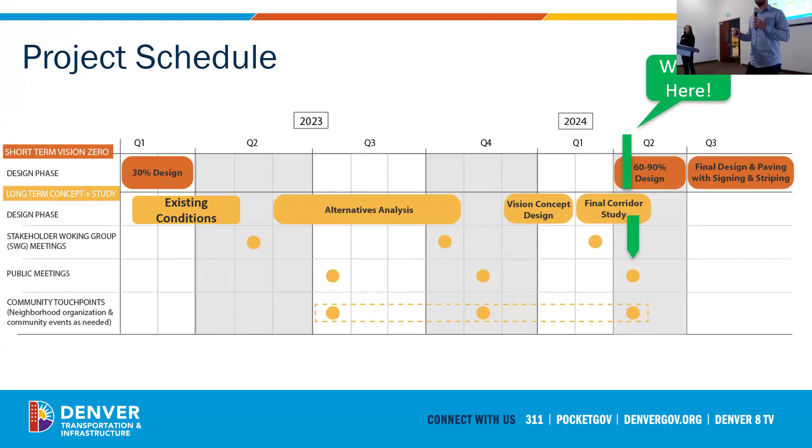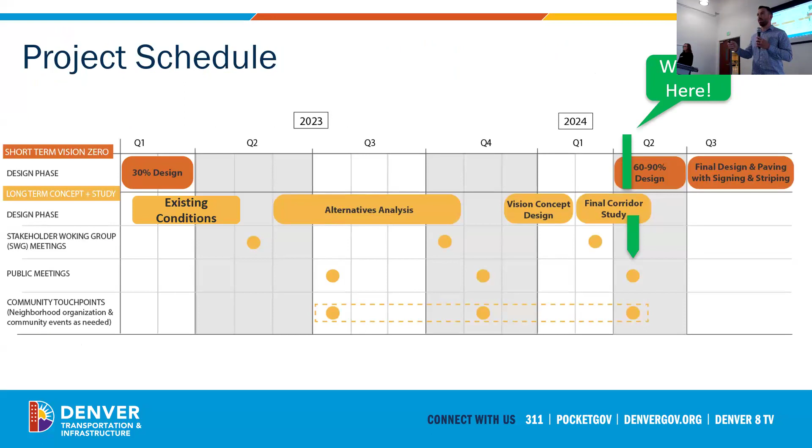So where we are on this project, as I said, final public meeting. We've had 3 of these previously, this is the 4th. We are finalizing our corridor study and presenting to you all the design we're planning to move forward with for the long-term improvements. For short-term improvements, we're finalizing and tweaking those last-minute changes for the implementation happening this summer, specifically between 40th Ave and 17th Ave. That's that 4 to 3 lane conversion.

So how did we get here? About 11 months ago, last summer, we had our first public meeting here. We submitted about 400 flyers to the neighborhood, put out about 20 yard signs, put out notification to the council and RNO newsletters. We had about 40 people attend that meeting, whether online or in person.

In addition to that public meeting, we had a bunch of community touch points. We came to farmers markets, went to block parties, and had about 125 people interact with us at those locations as well. As a result, we had over 100 comments from folks from public meetings, touch points, and direct emails as well.

What did we learn from that? Really first and foremost, making sure we are using our existing plans that have been talked about on this corridor in the past to determine what we're going to do here in the future. A big thing was people want to cross York — this is a neighborhood street. While it is an arterial, it still runs through a neighborhood, a residential street. We understand this is a barrier for people trying to cross York Street in segment B. Improvements could be made to the west end of the park and golf course, really talking about making sure we can cross York to get to regional destinations such as City Park.

Josephine, north of 40th Ave, should be a neighborhood street and not a freight route. As of right now, with the one-way conversion or configuration, it really operates as a freight route as well as a residential street.

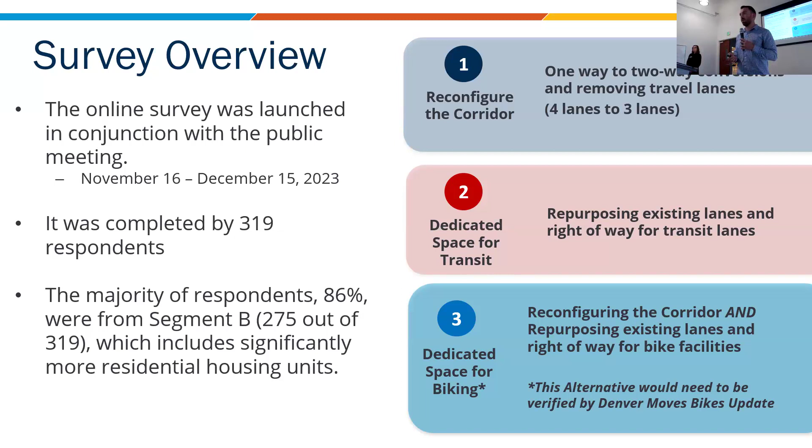Aside from that, for segment B and segment A, we'll have that full design. The other 2 options we presented were dedicated space for transit and dedicated space for biking. These 2 were direct responses to what we heard from you all in phase 1 of our outreach, and both would have pretty significant changes on the corridor.

So segment A, York, would be the northeast part of York Street. Segment A, Josephine, northwest, and then all the way down. As you can see, there's a trend through all 4 or 5 of these segments, and it's that reconfiguring the corridor really came out on top from what we heard from you all.

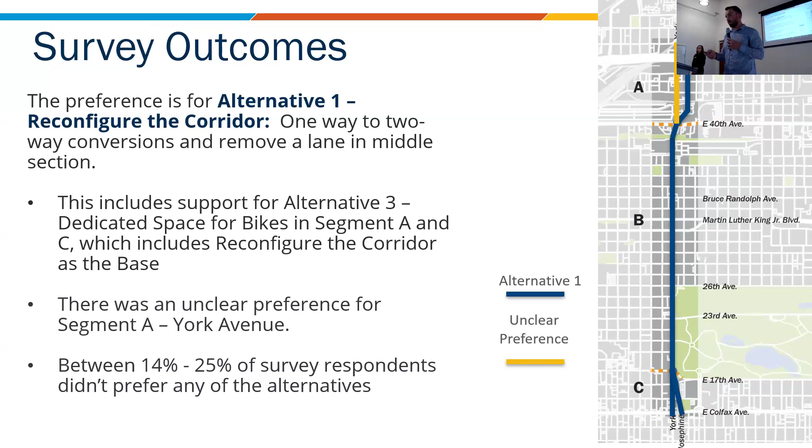And then lastly, two months ago now, in February, we had one additional engagement opportunity talking about the short-term improvements for segment B. This is the 4 to 3 lane conversion. Again, same outreach methods: flyering, yard signs. We had about 100 people attend, and we've received probably 50-plus emails supporting and voicing concern, kind of everywhere in between, on the improvements coming this summer.

Mainly what we saw from that meeting and from our outreach was general support. Usually we don't get emails that say we like this project and want to see it move forward, so it really helps us know we're moving in the right direction. There were concerns as well, making sure we're not just focusing on York, that we're not moving a crash pattern from York Street to the parallel streets in the neighborhood. There were concerns about vehicle congestion on York and increased pollution from that congestion. We've done study after study on this corridor to confirm that congestion isn't going to happen on this stretch, and we'll talk more about that later with some short-term slides. Lastly, is there any way to make the signing and striping for that short-term improvement more permanent, which we'll also talk about in a couple slides.

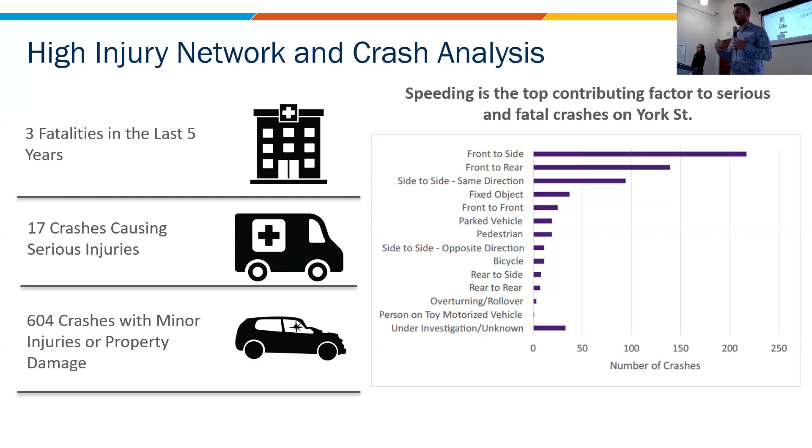The top 3 crash types were front-to-side, front-to-rear, and side-to-side. What that really means is a lot of left turn crashes occur on this corridor. Front-to-rear crashes happen when there are left turning vehicles turning from a through lane, or right turning vehicles through a through lane. Side-to-side crashes are typically side swipe crashes. The first two really do result in the serious and fatal crashes. Side swipes, not so much, but with these improvements we're presenting, we will see a reduction in all 3 of those crash types.

Goals generated from the public outreach as well as internal analysis always included making sure multimodal improvements are on this corridor, meaning all roadway users have access and can use it comfortably. Safety is the top priority. As discussed, there's a high crash picture here, and we definitely want to bring that down.

Environmental resilience: for those involved in phase 2 of the public meeting and the 300 responses to the survey, there was a lot of concern about tree removal. That is not happening. We said it last meeting, but I want to reiterate — trees are staying on York.

Connecting communities and supporting communities — crossing York and connecting those neighborhoods north-south. Transit infrastructure improvements make sure transit is still operating as well as it is, or improved at specific transit stop locations. And lastly, transportation equity, making sure this is an equitable project across the city.

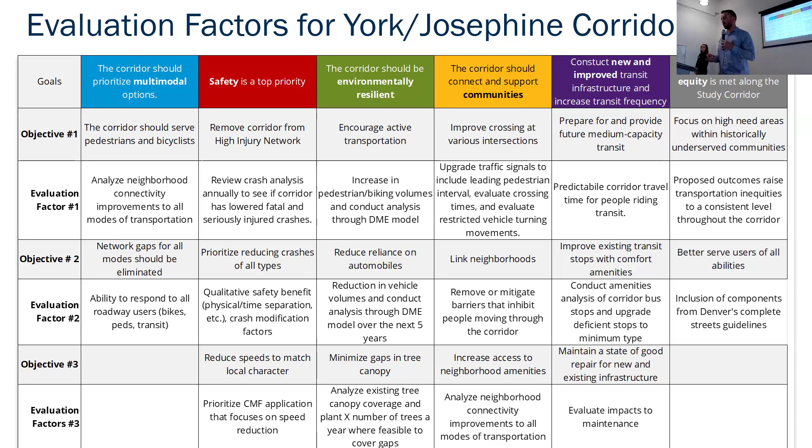So again, based off of everything we've heard publicly and then everything we've heard after our analysis, alternative one really matches both of those, showing that two-way conversion on the north segment and the south segment, and then 4-lane to 3-lane conversion on the mid segment.

So I teased it enough. I'm going to give it over to Eileen, and she's going to show you what this is going to look like, rather than just talking about some slides. We do have a quick moment for questions. Apologize if anything didn't make sense. Please let me know. Do we have any questions regarding the alternatives analysis that we completed?

Yep, sorry. So if speeding is the issue, why does taking away one lane of traffic, which is needed, going to solve the speeding problem? I mean, people speed no matter what, how many lanes you have, don't they?

FHWA has a proven safety countermeasure to reduce speeds on streets to get people to go the speed limit, not below it. Dropping a lane does result in speeds being reduced, because it increases congestion to the one lane, but not enough to increase travel time significantly. When we have a road like York, where we have 4 lanes currently and our ADTs are sitting at about 19,000 vehicles a day on volumes, we do not anticipate seeing a time increase, but we are seeing a speed decrease. The FHWA proven safety countermeasure threshold to reduce 4 lanes to 3 lanes is 25,000 vehicles, so if we're sitting at 19,000 vehicles, we shouldn't expect to see increased delay, but we will see decreased speeds.

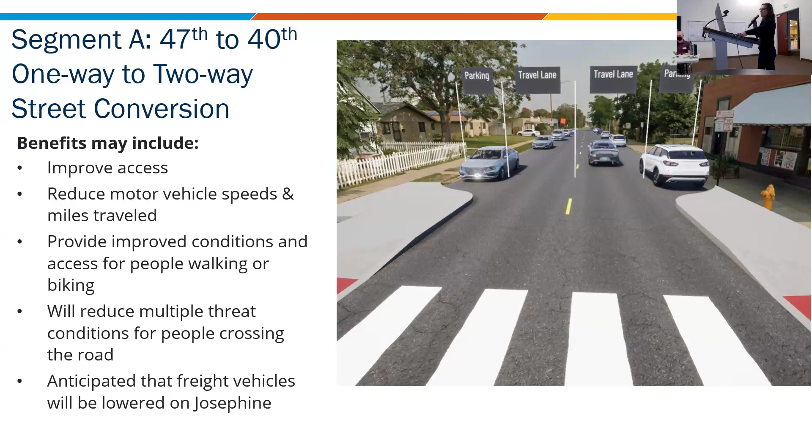Segment B would keep the short-term concept that's heading in this summer. It would keep that going. Mike just talked through a lot of the benefits, so I don't necessarily need to go through that. It's a more complete street.

One thing mentioned by a member of the public at the in-person meeting is about the meandering. We're looking to do those improvements to benefit both the east and west side of the street. We have the corridor roll plot, and we'll go through the online meeting segment by segment, or block by block, with the long-term corridor vision.

So certain parts of the street will have improvements on the east side. That could be hardscape filled in with greenscape and green infrastructure. Then it meanders over to the west side and has an additional left-hand turn.

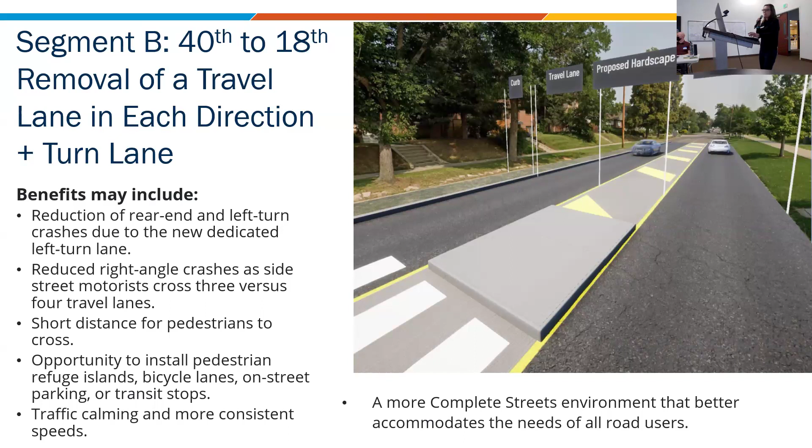For segment C, as we get further down, this is just a visual of alternative one. Again, if this were to convert to a two-way street, we do want to allow some flexibility, and that's really because of the Colfax BRT that is coming in.

We want to recognize there is a need, and we have options to start with and reevaluate in the future. This goes back again to Colfax BRT—we don't necessarily know how people are going to change their behaviors. Will everybody be walking down York and Josephine to get to Colfax BRT?

Will people be using this as a bike corridor? Where are people using their vehicles, and how are they getting around? We really want this to be open and functioning for 3 to 5 years, and then see what those behaviors of people needing to use the BRT, as well as vehicle patterns, look like before we move forward.

Eileen, can you explain what BRT is for folks who don't know? Thank you—Bus Rapid Transit. I'm not going to go into all the details.

Colfax is in final design right now, I believe; I'm not sure when construction is. They will be putting the bus in the middle of Colfax, running more frequently, between 5 and 10 minutes, with its own dedicated lane. So it's going to be extremely competitive, or even faster than driving a car on Colfax. This is in response to it being the highest ridership bus route—I believe in the state, I know it's in the city, but I'll say the state because I feel confident saying that.

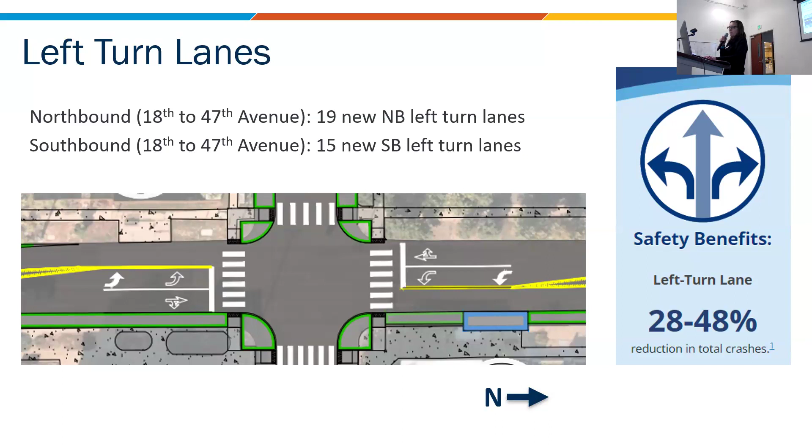Greening the street, essentially throughout the whole corridor, we are recommending that every place where we say we need to move the curb or we can add pavement, we are looking for green infrastructure.

I'll also note, particularly in segments A and C, so North 40th to 47th, and then 18th down to Colfax, our recommendation is to rehab and upgrade those amenity zones. That's where we're lacking trees. Not only grass, there's grass out there, but I think the tree canopy is key, and that was one thing we heard from public feedback and comment too, about whether there's any way to combat the noise from York, the freight movements, and the pollution.

So we're really looking to add trees and revision those two areas specifically, and anytime we're doing improvements with hardscape, we're hoping we can get in the green infrastructure and additional landscape.

Transit improvements—I apologize about this highlight, that was a note to myself to make an actual change, which I did not do. It's on the board, but I'll visually say, or tell everyone, what an upgrade to Type 2 is.

There are 27 bus stops in segment A and B. I believe there are 2 in segment C, but this is really recommending upgrades to those bus stops.

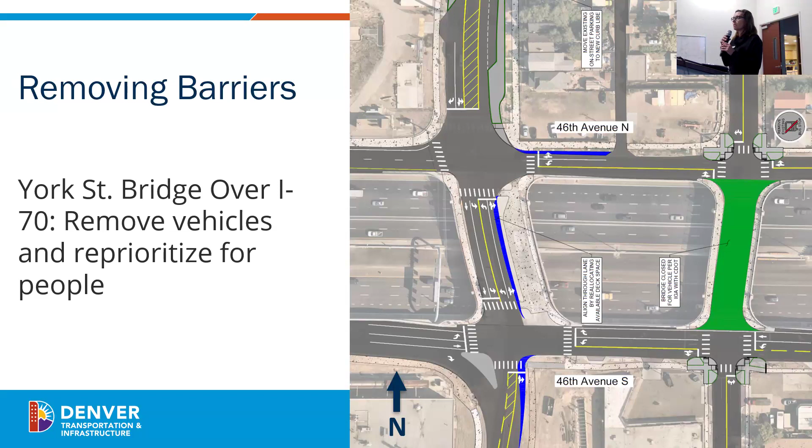And while there's much more that could come, or that will come, in a future phase of this project - what does that green space look like? What is it right now? It's concrete. What could that look like? That would be determined in the next phase. But right now, we have CDOT's agreement that this can happen.

One thing I want to note, tying back to equity - this is our recommendation for implementation, and it goes back to looking at areas that have been disinvested for numerous decades. Our recommendation is that we move forward with segment A first. We're hoping there's a federal government program called Reconnecting Communities and Neighborhoods - a national competitive program with billions of dollars available every year. Denver was recently successful with another roadway in receiving this funding.

We've looked at this program and a lot of the goals and priorities for it. This project, specifically in this section of York-Josephine, it sings, it matches, it scores very high. We're really excited about that.

Segment B, the reconfiguration of the roadway will happen with paving this summer in 2024. In the future, look 2-3 years out, evaluate, and then move forward to solidify the improvements and make any changes that are necessary.

Also, during this time, we recognize that there's a number of old signals out there. They're on span wire, right? You can see them when you're driving underneath them. It's just the wire, it's not on poles.

Denver will be moving forward and applying for funding through some other competitive programs with CDOT, the Colorado Department of Transportation, as well as the regional agency, which is Denver Regional Council of Governments, to get funding.

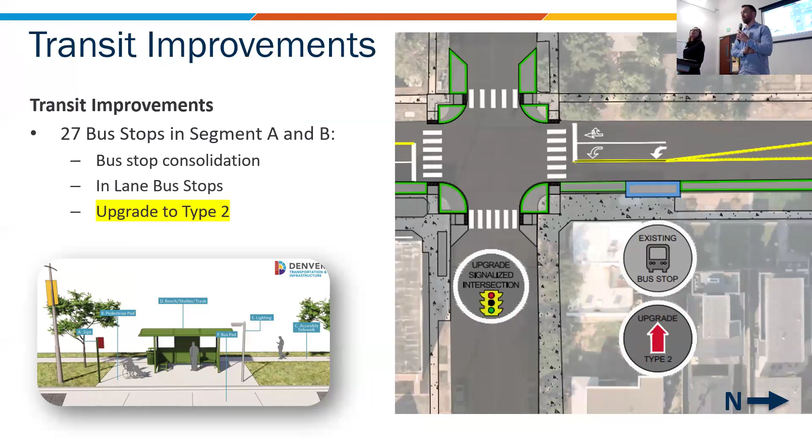Hi, I've got two questions on segment B. With the addition of the left turn lanes at intersections where there are traffic lights, will there also be left turn signals added, or has that been deemed unnecessary? There will not be at this time, in the short term specifically. I can show you on the roll plot after this what that will actually look like, because we've designed them in a way where vehicles making those left turns aren't having their vision blocked by the vehicle in the opposite direction making a left turn. There's no way to describe it without showing you on a map, so I can show it to you afterwards.

I hope I'm not repeating myself - Denver will continuously apply for funding to get those signals rebuilt. They're on the signal rebuild list. Yes, the span wire signals are already on the rebuild list. We've already applied for four of those signals to be upgraded through a CDOT program. We have not heard back yet if we've been awarded those dollars, but I think that's for 2027 when, if we are awarded those dollars, the existing span wire signals could be upgraded.

My other question is about the hypothetical bike lane on Josephine in segment B - are you able to share any changes, like what Josephine would actually look like? That's something else I can provide to you. It's called a neighborhood bikeway - we have each of our bike lane types available online, if you search Denver neighborhood bikeway it'll give you the full description. Real high level, it's not what you'd imagine like a typical bike lane with a true lane. It's actually improving each intersection to reduce speeds and make it more comfortable for a bicyclist to ride in lane on the corridor. Thank you.

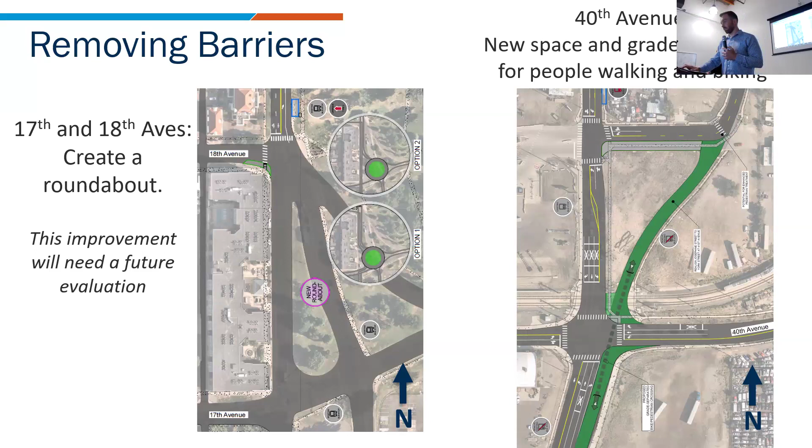Should I go? Is this on? Okay, so I have a couple. With the shared use and multi-use sections that are either 10 to 12 or 12, I guess, I would have a concern about the multimodal aspect of that with scooters and whatever those wheelie things are called that you stand on, like a skateboard, and e-bikes.

Right now we have in City Park really mixed traffic that's very heavy with multiple modes - pedestrians with dogs, little kids on little bikes, big people on very fast e-bikes, and big people on very fast wheelie things, all mixed together. And those roads are not 10 feet wide, those are much wider roads, and it's still very uncomfortable. Those trends will only continue. I love the idea of getting the whole corridor, but if it gets any volume of use of many different users, that's going to be a very challenging mix of things going on.

And 10 foot wide, if that's 10 foot wide in two directions, one direction makes it better, but still. This is something across the city we're trying to figure out - the bike program is figuring out how that operates. That team just updated their design standards about 2 years ago, and they're already looking at reanalyzing those design standards because of this influx of electrified vehicles.

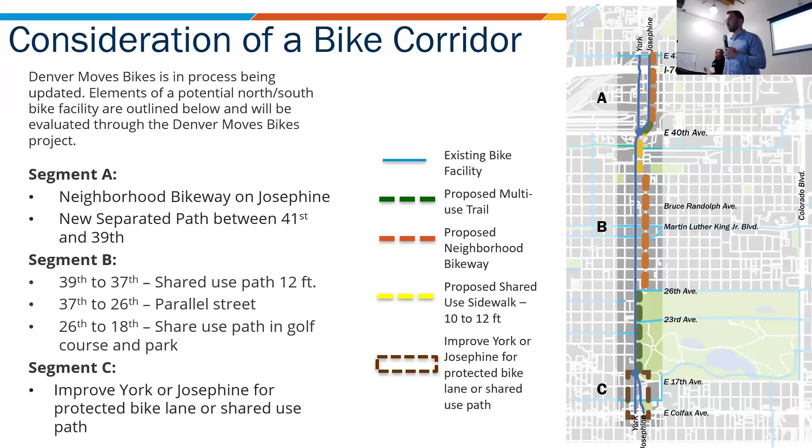Yeah, so I walk this stretch all the time, and I'm curious about the alley, and I'm also curious about your thoughts about redevelopment of the residential pieces. A block north of there is an apartment building called the York that has an access point onto the street to serve its parking garage. And when I look at that corridor, which has a house that's been condemned, that the city's been fighting with them for the past 3 years, that seems like the kind of place where you might get redevelopment, and you might want it, but you might want to plan for it on the transportation side of things. And the alley is totally underused because it's just parallel. Basically you get high school students doing weird things to get into the East High School parking lot. It just seems like that space of the alley, if you could reuse it, and also think about what redevelopment might look like for that residential block, that would maybe be a good idea.

Absolutely. And I know this is a different transportation planner thing - there's the community CPD, community planning and development department. I know they're looking at this block long-term through Blueprint Denver, which is the plan identifying where that redevelopment could happen. I don't have the answer of what they're planning on doing, but that plan would tell you what their next steps are there.

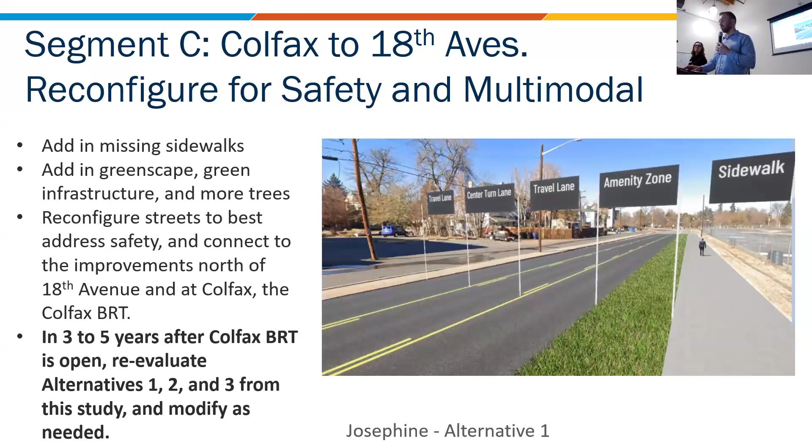What is called span wire? I don't know if we have an image of it. So the signals on York right now that are just hanging from what looks like a rope - those will get replaced with a full signal with a mast arm, so there's a signal head above each lane. It'll be able to add left turn lanes, be able to add pedestrian countdown timers. It'll be a fully functioning signal rather than what we have out there now, which pretty much just tells you red or green.

Okay, that makes sense, I appreciate that clarification. Does that also tie into the street lights? There's an overhead line that connects all the street lights - is there any intention to move that underground, or does that continue to be overhead wiring? That's the first time we've heard that in this year of engagement, but I'm glad you said it, because it is something we look at on a lot of our corridors: undergrounding utilities.

So we'll put that comment into this long-term design plan. Yeah, I think that'd be good. It just seems like a random wire that connects all the lights together.

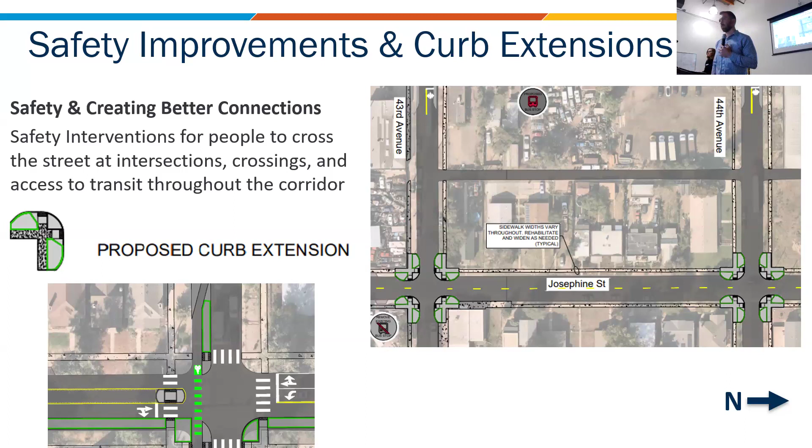I apologize, I missed the beginning of the meeting, so I understand construction will commence this summer on eliminating the 4 lanes and converting to 3 lanes of traffic along segments C and B. Is that correct? That's just repaving, restriping from 40th to 18th. In segment B, it's not going to be the full roadway reconstruction yet, just the repaving, then paint and post to start.

Does that include a new curb as well? Because with the slope, despite the Montclair Basin and city park drainage, York can still see heavy water flow heading north towards the flat, and it overflows and breaks the bank of the curb. Sorry, I keep interrupting you. Yeah, this is just repaving, so there will not be any curb adjustments at this time.

I know farther northwest of here there was a full redrainage project completed that I've been told is supposed to help the flooding on York. I don't know a lot of details on it, but there should be a reduction of that flooding this summer. I can get you in touch with that person though.

So that's simply just asphalt repaving this summer? Correct, yes, just asphalt, nothing outside of that. And then the upgrades are restriping to match the plan, the vision at this point? Correct, that's all. Thank you.

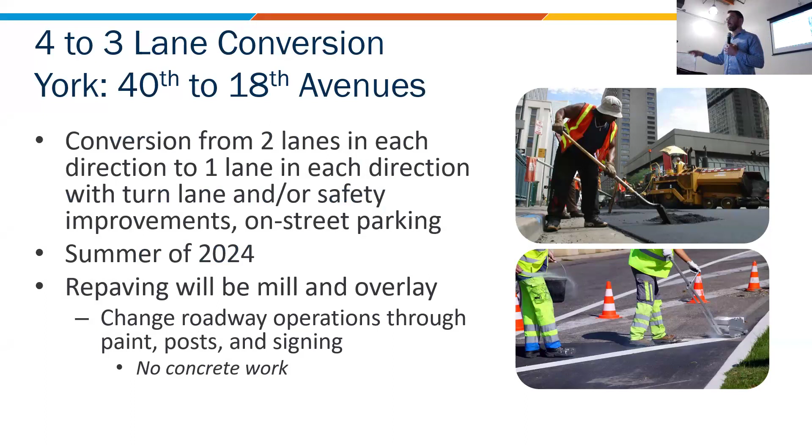We touched on this a lot in the Q&A as well as throughout the presentation, but we are moving forward with short-term improvements on York from 40th to 18th Avenue. This is the conversion from 4 lanes to 3 lanes. It'll happen with repaving this summer, and as answered in that last question, it won't be concrete work—just repaving, changing the striping, and occasionally adding flex posts. Here is just one snippet of what that looks like; we have a full roll plot in the back with this as well.

So if you want to see what your intersection would look like, the key elements are all kind of included here. This actually includes the left turn I was trying to describe earlier, which is a positive offset left turn. We'll start from right to left. The positive offset left turn is putting a painted median between the through north lane and the left turn north lane. Right here.

This allows the left turning vehicle to actually be able to see only the through vehicle going southbound, meaning that plenty of us have gotten stopped at a left turn lane and all you're looking at on the other side of you is the car trying to turn left in the opposite direction, and you don't know what car is coming down in that through lane. So this allows you to see past that vehicle so you can make that left turn comfortably.

We do have, at 22nd Ave, this is along the golf course, along the park, there will be parking added as a result of the lane reduction as well. This is again a proven safety countermeasure for speed reductions and also an increase where the demand in parking is happening with City Park, with whatever is happening at City Park in the future when it comes to vehicles. We want to make sure there is availability for, at a minimum, the ADA parking as well as quick access there.

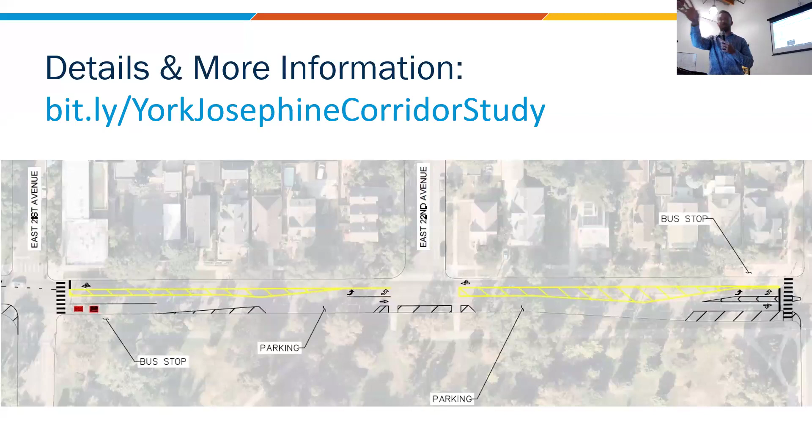So we have this roll plot in the back for the short term. Happy to answer questions. Long term is in the back, short term is in the front. We can go through that in more detail for people that have specific questions.

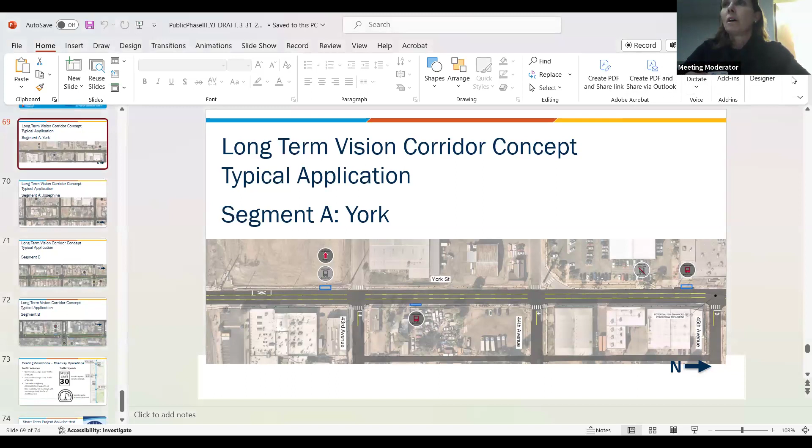What I'm going to do now, since we're going through a lot of slides, is review this. If you don't have time to stay on, there's an online questionnaire noted here: bit.ly/YorkJosephineCorridorStudy. We've posted the same images I'm about to discuss as a questionnaire, so feel free to take it at another point if you need to leave. Otherwise, I'll get going and Alan can help answer questions too. You can raise your hand or unmute yourself.

I'm going to start at the bottom, segment C, closest to Colfax and 16th Avenue. As was noted in the presentation, we're recommending reconfiguring the streets for safety and multimodal use. We're also recommending flexibility to allow the Colfax Bus Rapid Transit project to be complete before deciding the final vision. Are there any questions or feedback the community would like to share at this time?

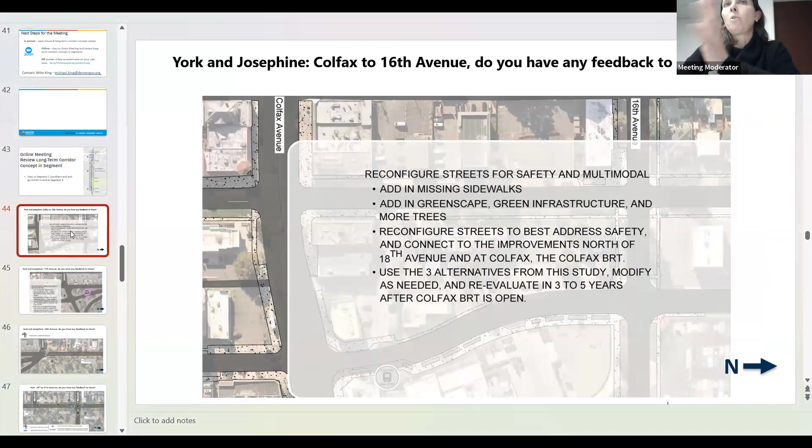One of the things Mike King presented about holding the next phase for Colfax all the way down to First is that we'd look that far due to the two one-way streets, to make sure that if this section from Colfax to 17th is changed from two one-way streets to two-way streets, that possibility could happen further south. With that future study, we'd also look to see if it could just happen from Colfax to 18th.

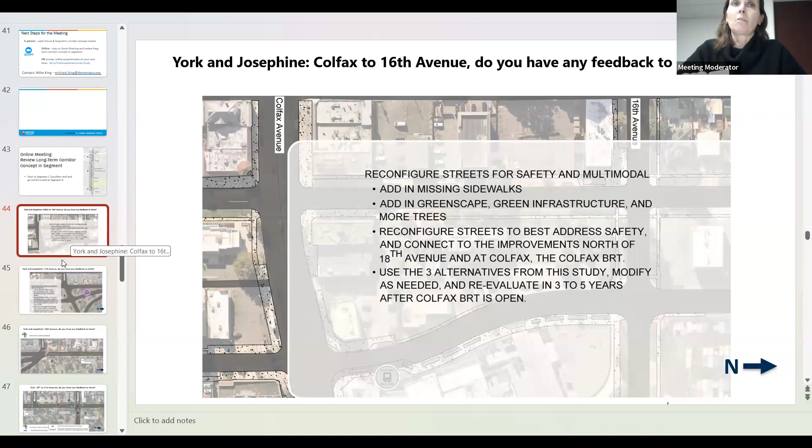And Jason, I see you have your hand up. Yeah, I put it in the chat too, and this is really just a comment to say, first of all, thank you for all the work you've done to get us to this point. Generally I think this plan represents a huge improvement, so thank you. I was just going to say, I'm generally dubious of roundabouts—not that I'm a city planner, just as a driver they seem to confuse people and rarely help more than hurt. But if there was ever a place where it might work, I feel like it's this particular sort of multi-directional intersection. That seems like a great solution to try there. Thank you.

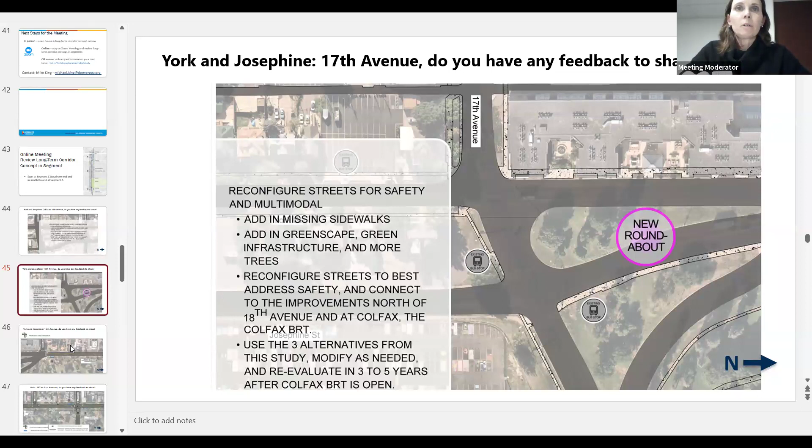All right, moving forward. We're at York and Josephine where that ends at 18th, and this is the start. Also, what you'll see this summer relates to removing a vehicle travel lane and starting to add in the turn lane. You can see southbound York, that's where the two lanes start to match, and then northbound, that's when the removal starts. Also recognized here in this visual, there would be an existing bus stop that would be enhanced as well. You can see visually where it says sidewalk widths vary throughout, rehabilitate and widen as needed.

So this is where the possible shared use path for bicyclists and people walking would be upgraded and added, or it's existing right now—it would be upgraded to be 12 feet. Any questions or feedback?

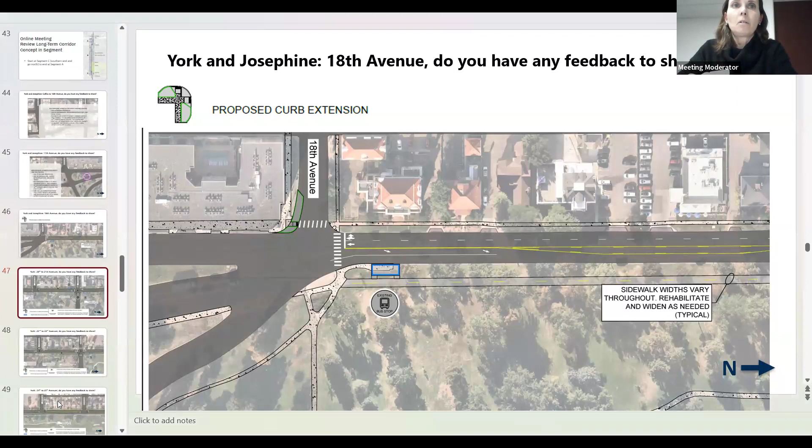Moving forward north, we are on York between 20th and 21st Avenue. You can start seeing visually a lot more is happening. One, we would have that upgraded signalized intersection at 21st Avenue. As mentioned, right now the existing condition is just wires with traffic signals.

Additionally, you can start seeing the gray that's outlined in green. That is proposed hardscape, essentially saying we would be able to move the curb inward and lay in more concrete. That would allow new curb, and we would look at the drainage then. This also offers the possibility to expand the amenity zone, meaning we can look for additional landscaping and or green infrastructure.

As mentioned before, the existing bus stops noted in blue would be upgraded to include a bench, shelter, lighting, signs, and a garbage can. And again, we're still adjacent to the park, so that's where the proposed shared use path, 12 feet, would come in. We would preserve the existing trees. While this is a straight line right now, as things move further into design it could meander, but we're looking to have that 12-foot shared use path.

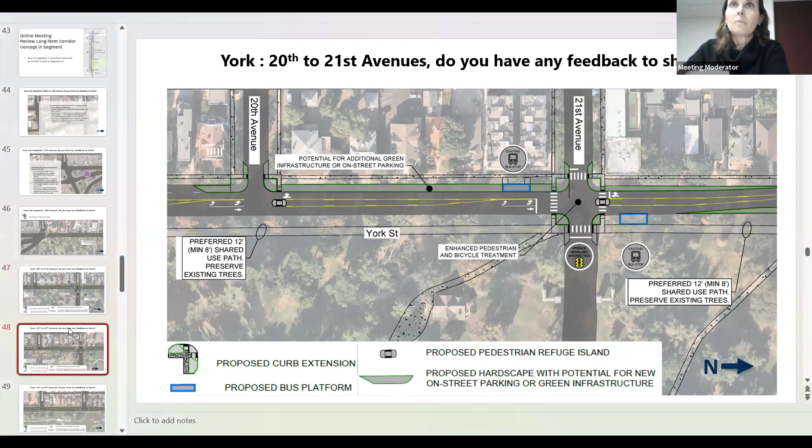Moving forward, 22nd Avenue to 23rd Avenue. The majority of improvements, as you can see, are on the east side. We would again have these enhanced crossings at 22nd and 23rd, and look to have the existing bus stop upgraded. Then, again with the gray and green outlined area, that would be extending the curb and allowing for the opportunity for landscaping and green infrastructure. Any questions or feedback in this area?

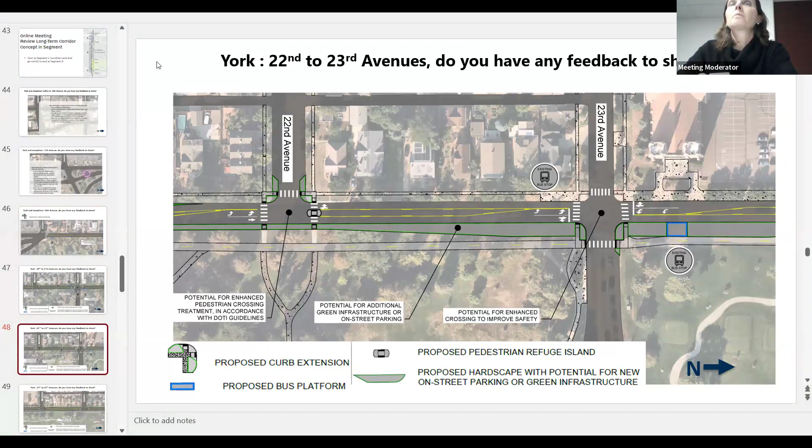Any questions or feedback in this section? Jason, any questions? Feedback, again, all really positive.

Thank you again for this. I live at the corner of 24th there. Just in the period that this study has been going on, we've seen 3 crashes between 24th and 23rd, one of them fatal. I think this feels like a very reasonable attempt to do something about that. One thing we noticed living on that corner is there is already a slight wobble in the east side of York Street there, and an awful lot of cars seem to not see it and hit the curb. I wonder if that's something you'll want to keep an eye on with the meanders you have here. If you look at the curb alongside the park at 24th, you'll see it's all broken up, from cars and especially trucks and trailers hitting it.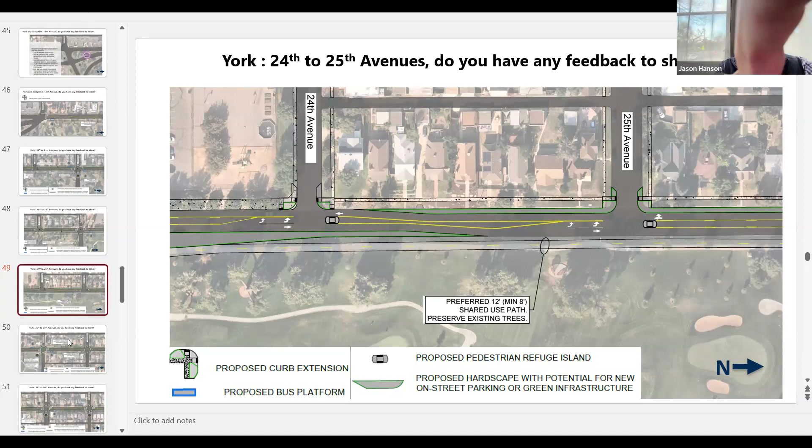Any questions or feedback in this area?

From the chat, Emily wants to know: with all the lane reductions, are there anticipated reductions or elimination of high GVW trucks using the corridor, i.e. 10,000 pound trucks and semis?

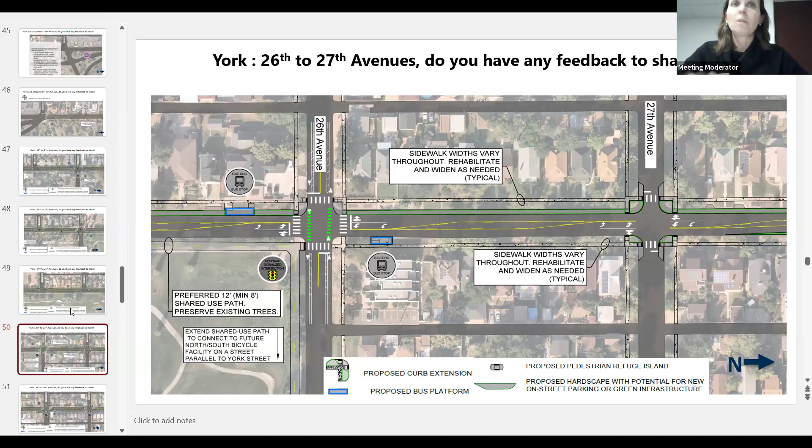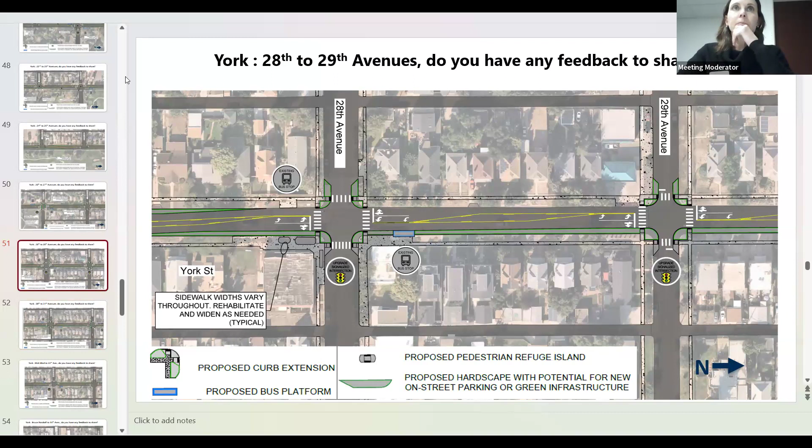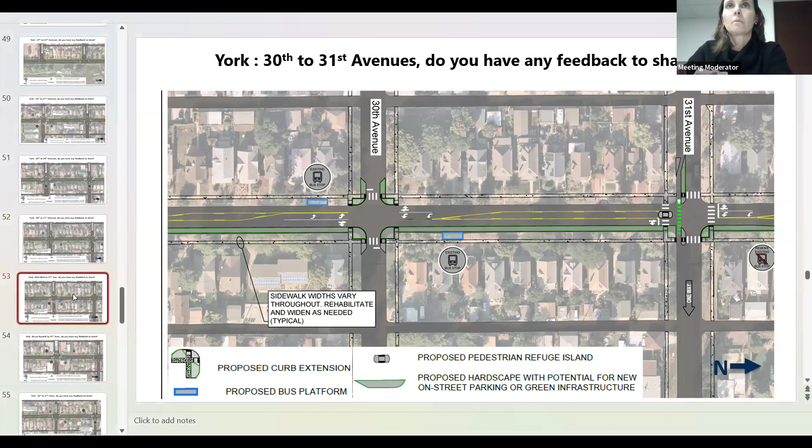From the chat, Leslie says: I know York is an arterial, but are there any crosswalks that will have pedestrian prioritized crossings with button lights?

Yes. Every time there is an upgraded signalized intersection, it will include pedestrian signals as well as push buttons and countdown signals. When we look at future corridor improvements, we would look at the signal operations and, with our counts of people crossing, determine where we can do leading pedestrian intervals, where all lights stay red and pedestrians get about 5 seconds to start crossing before traffic going the opposite way can go. So yes, that is part of every upgraded signalized intersection—it includes improvements for people walking.

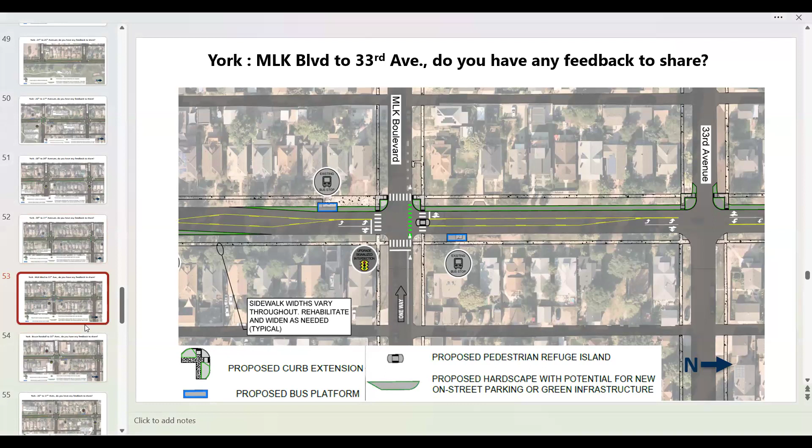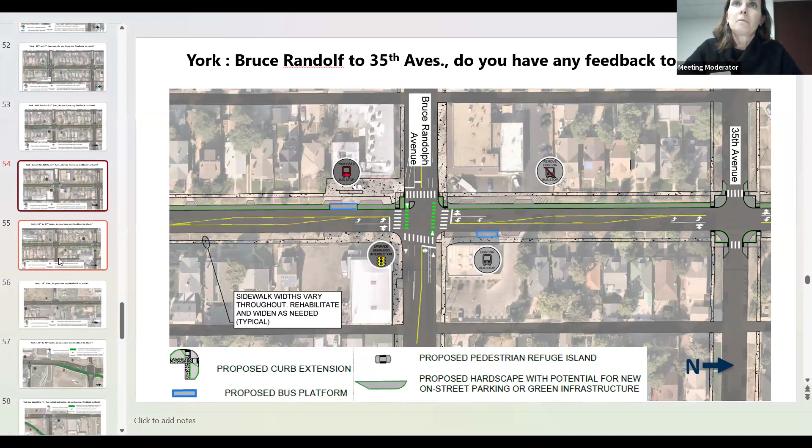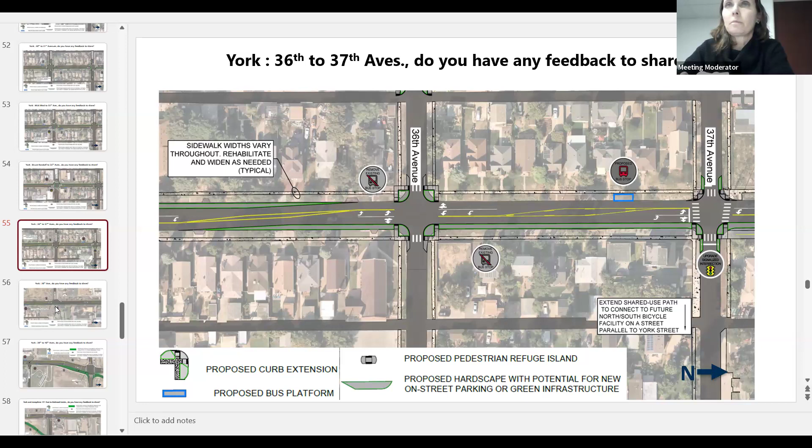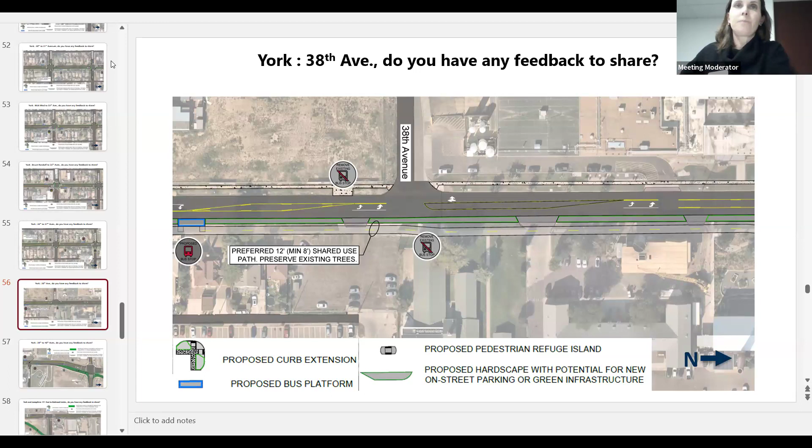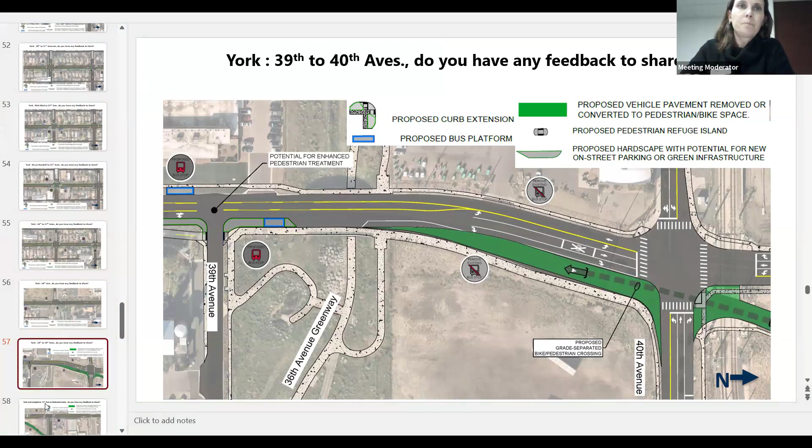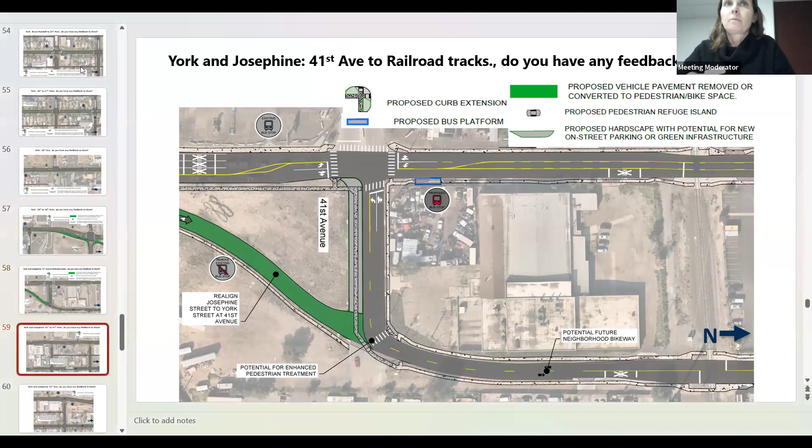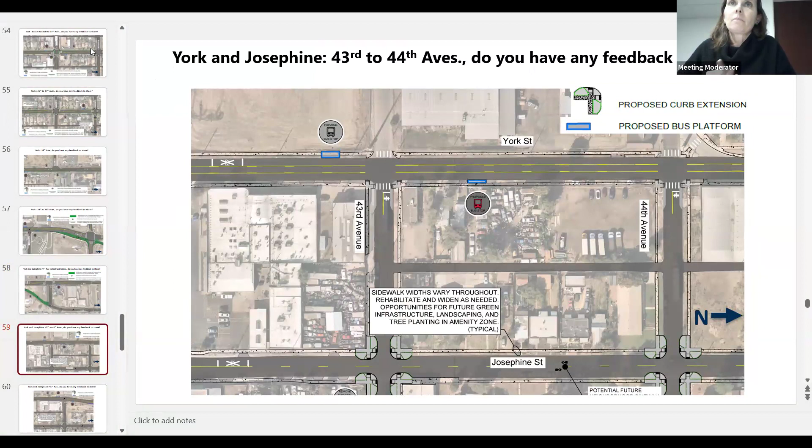In the chat, Jason says this would be a major upgrade to biking in this part of town. Thank you.